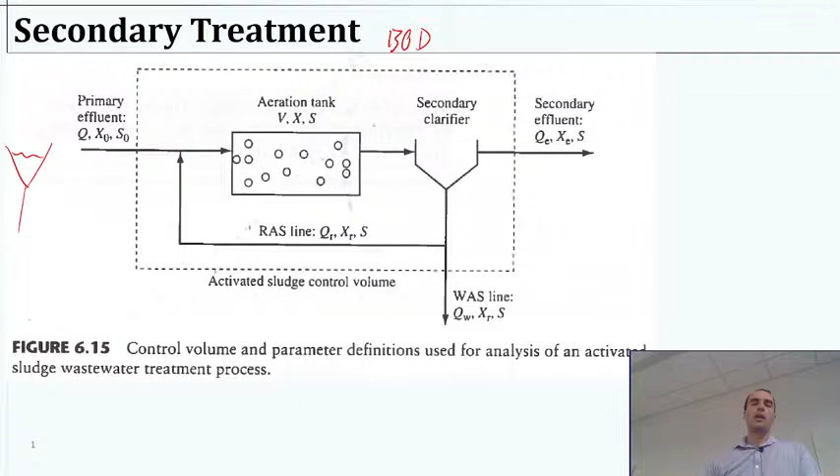The primary effluent comes in as our influent to our secondary system. The initial thing typically will be our bioreactor, a spot where we aerate quite heavily, pumping lots of air. We'll have large blowers in a lot of these treatment plants that are just blowing air from the atmosphere into the water to create all these bubbles. Technically, you could supply direct oxygen and that could work too, but that's kind of expensive, so we just typically take air and blow it through the tanks.

That will mix them, so this will effectively be a well-mixed tank typically. It will act like a CSTR. Of course, maybe we could design it in segments and have a series of them, but a generic tank will be a waste-activated sludge tank.

A little more jargon there: waste-activated sludge, or WAS. Activated meaning we're activating it with oxygen, waste because it's waste, and sludge because it makes a slurry of microbes that can settle out into basically a sludge.

So our activated sludge tank, that's where most of the biodegradation happens. What we want here is a bunch of happy bacteria that are eating and reproducing and doing all the fun stuff in life, right? So they're just making tons of bacteria, chowing down on as much food as they have available, and then we're sending them along the way.

After that, the next part of secondary treatment is another clarifier. I say clarifier, this is the same thing as a sedimentation basin. We've already talked about what a sedimentation basin is. In wastewater, we just tend to call them clarifiers, and it has the same function. So when I talked about that primary clarifier, that's what I meant, it is a sedimentation basin. It's very typical to see wastewater sedimentation basins as circular and called clarifiers.

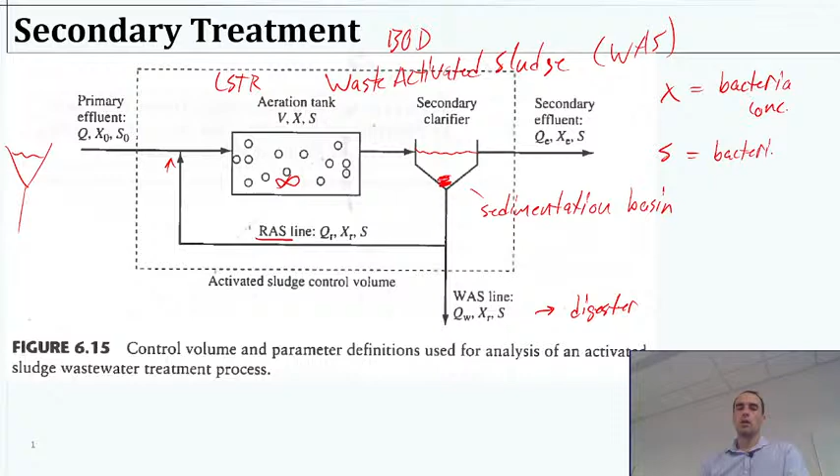S is going to be a mass concentration of bacteria food, the BOD. I've got more slides that will elaborate, but just to give you an impression, we're going to end up with a system where we care about a couple of different things: the amount of food that's there, because that's our waste stuff we need to get rid of, and the amount of bacteria there, because they are the ones eating the food. So we're going to end up with a system that has multiple mass balances if we care to deal with it that way, but fortunately we can simplify and take the mass balance principles to a more simplified mathematical approach to handle our system.

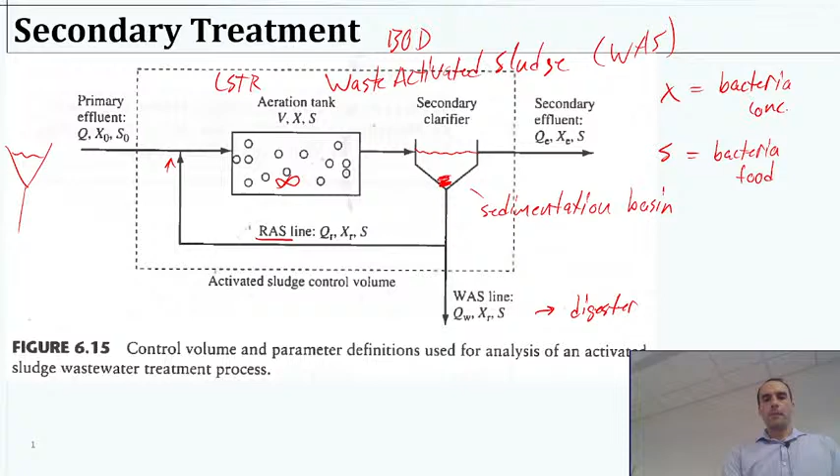Okay, so we're going to use microbes. Here's the terminology again with a bit more context. The waste activated sludge, or the activated sludge generally, that's the slurry of microbes. When we are aerating it or mixing it, that makes the whole system a CSTR functionally in the aeration basin. The clarifier is not aerated, so usually we assume nothing important is happening there in terms of the mass balance, in terms of the food being eaten. We just kind of ignore that.

We might call the wastewater high strength or low strength, or weak or strong wastewater. Really, what that means is how much bacteria food is in there, how much BOD is in there. A weak wastewater would be something like 60 milligrams per liter of biological oxygen demand — milligrams of oxygen demanded, or that could be demanded by biology, per liter.

Just as a side note, the saturation for dissolved oxygen — we're going to talk more about this later — turns out to be, at room temperature, typically around 8 milligrams per liter. So if in every liter you're demanding like 50 or 100 milligrams of oxygen, and you're not having really good exchange with the atmosphere, then you're going to go to zero oxygen really quickly.

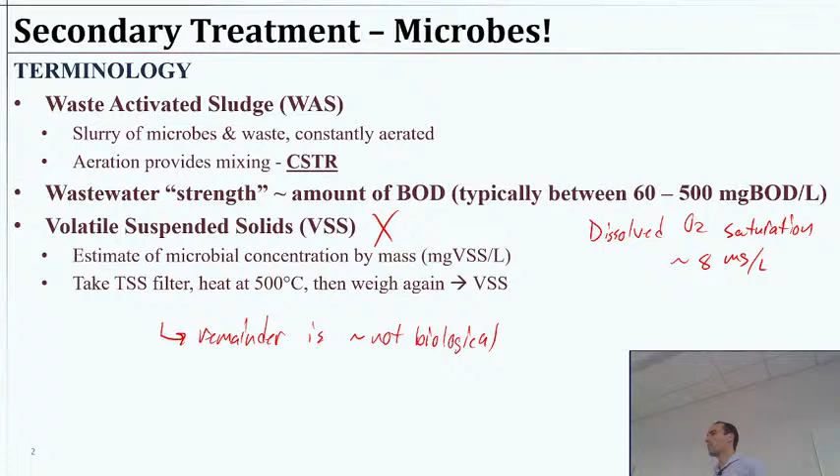Okay, so all told, this just gives us a way to get a mass concentration of bacteria, which is pretty handy, and a way to perform this measurement in the matter of a few hours. Take it, filter it, dry it, and then bake it.

Okay, typically our targets for how well does this work? We're going to aim for 95 to 98% of BOD removed. So if we had a strength of 100 milligrams BOD per liter, now we're down to the 2 to 5 milligrams per liter range. So if our wastewater strength was 100 and we removed 95%, now we're at a level that even if we did put it in 1 liter of water and prevented exchange with air, it would probably not bring the total down to 0, even with that amount of biological activity. So that would be great.

Now, as I said, we'll get more to all that later, but that's typical. Now, if we recall, I talked about this a bit already. We have some ratio of nutrients for the microbes: C for carbon, N for nitrogen, and P for phosphorus. It's kind of what biological material is made of. Usually we'll treat the secondary system as if carbon is the limiting factor, to try to get rid of most of the carbon demand.

But at some point, we've removed most of the carbon, and then we might have a lot of nitrogen left over, so that might tell us we need some different tertiary treatment to get rid of more of the nitrogen. Or in some cases, I think I mentioned that tissue recycling plant example, they actually had a lot of carbon from the tissues, the fibrous materials from recycling paper, but almost no nitrogen or phosphorus. So in order to remove them in the first place, they had to add fertilizer.

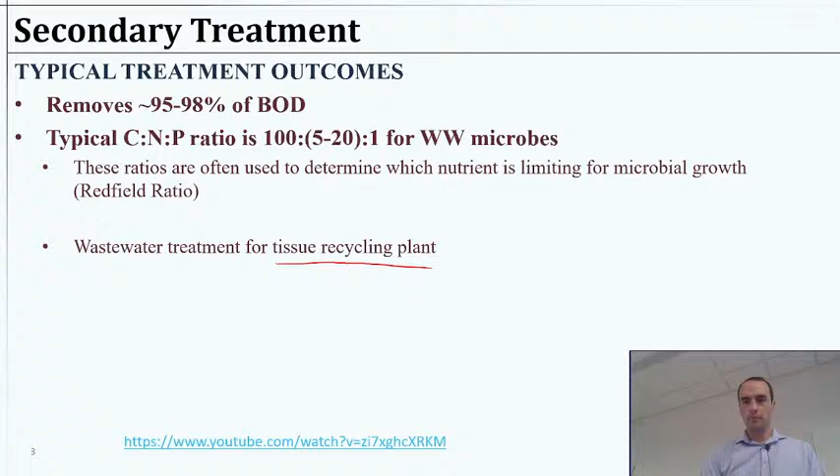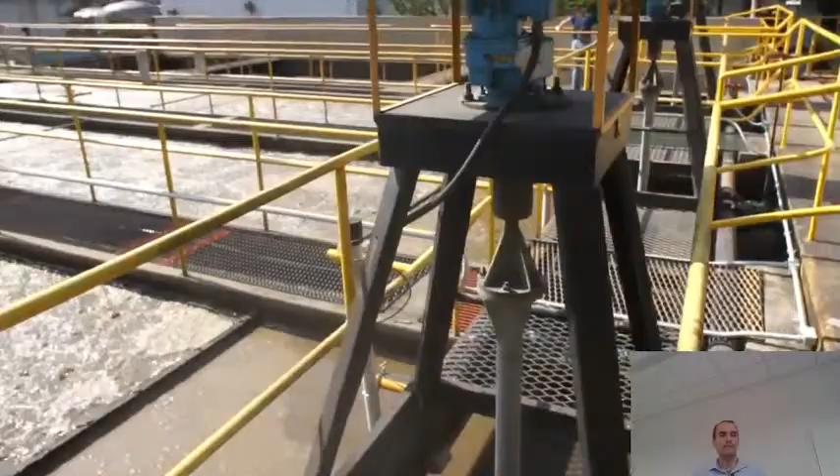And you see it's quite active with all the bubbles.

We've got plenty of guardrails. It might be obvious to you that you don't want to fall in there, but what might not be obvious is that if you did, you can't swim, because all the bubbles are going to remove all your buoyancy, and so then you sink. And if you fell into a wastewater treatment plant like that, you'd have to walk until you find the ladder, and hopefully you get there. So if it wasn't obvious, be very careful if you're walking around an activated sludge chamber.

It's also why, if you're ever on a sinking boat, you probably want to swim away from it to avoid all the bubbles that will follow as it sinks.

Buoyancy is helpful. Okay, so we've got a couple chambers here. You can see two chambers of this activated sludge, and it's probably going to act like two CSTRs in series. We didn't really talk too much about sequencing reactors, but it's something we could certainly do. I don't think I covered it with you guys, so we're not going to deal too much with it.

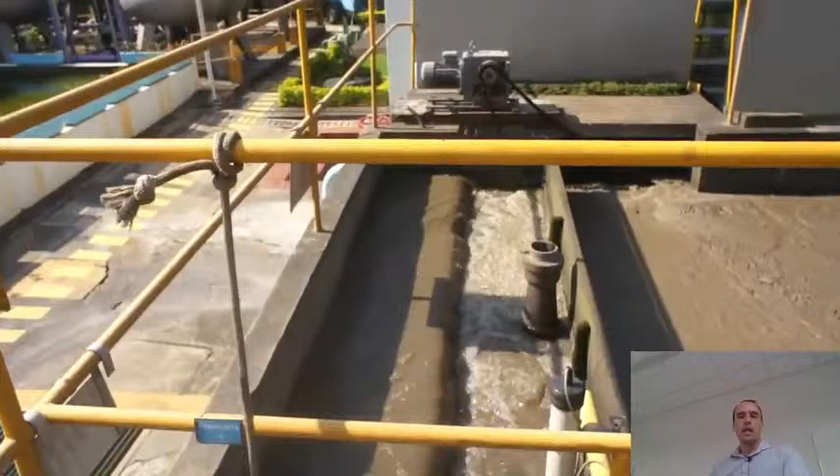Once we're done with the activated sludge chambers, we're coming back here, and we see it's really nice and rich and brown with bacteria and a lot of scum layer on the top. And now we're going to let it sediment again. It feels a little weird that we wanted to make it dirtier, but what we're doing is making it more particulate, right?

So after that sedimentation chamber that we just walked by, now this is probably, if I were to guess, where they would be dosing with chlorine or doing any other kind of disinfection step. This is a fairly compact plant, not a very large plant here. And then you see here, this is essentially our secondary effluent.

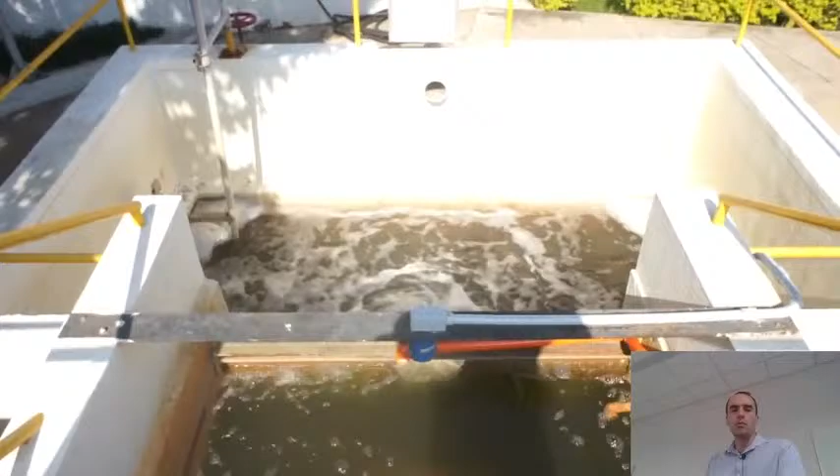Looks like that might just be where they're essentially done. So I would guess this would be a small city or a large village type of plant, maybe 20 to 50,000 people or something like that. I would be surprised if it was much more than that.

And you see here the water coming out actually looks a lot better, right? It looks a little bit more like river water, something much more reasonable than what was coming in. Still wouldn't want to drink that.

All right, so the question for us becomes, how do we model the growth of the bacteria and the removal of the substrate, the food? This is our challenge in terms of engineering a system. How do we design it? Well, we need to know at what rate the bacteria grow, and what does that depend on?

So, a little bit more terminology, and we're going to cover some terminology so that we can use what's called the Monod equation. This is essentially a growth equation that defines our rate constant.

Okay, so we've done rate constants for a while now this semester. We have some rate of change for our bacteria, rate of growth for the bacteria. We could say the rate of change of x is going to be equal to some function that looks like k times x to the 1 power, right? We've seen that, we've seen things that look like that. But instead of k, I'm going to say this is now mu.

So mu is essentially a rate constant. That's all I'm saying here. Given that, we can make a lot of sense to this and relate it to everything else we've been doing in the class so far, or almost everything.

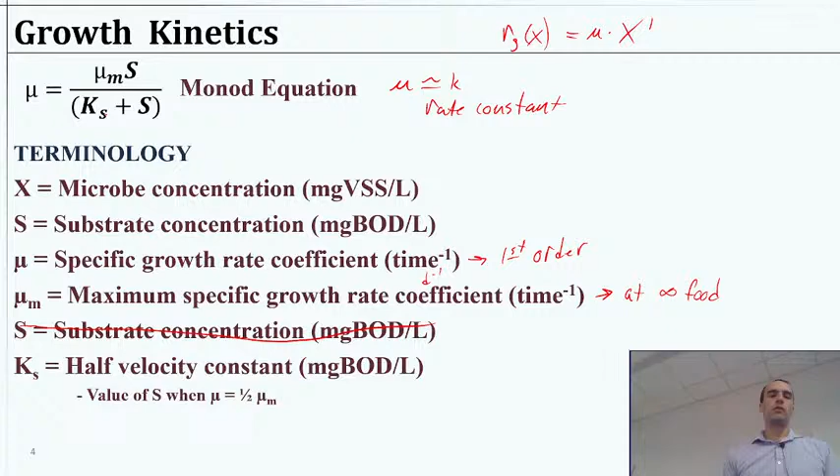And if we look back at the equation, it's like the maximum possible times the amount of food, divided by the amount of food plus half of what would get them to fully happy.

But this is kinetics that microbiologists will use quite often, and people digging into the nitty-gritties of wastewater treatment in the microbial sense. This stuff, and all the different factors that would affect this kind of thing, is perhaps interesting for them doing their research.

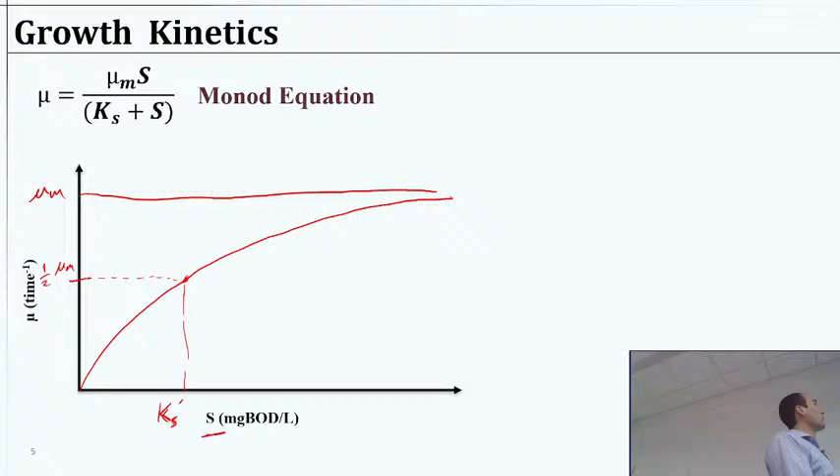Okay, so that's kind of in practice. You'll be given a value for Ks, probably. I mean, I guess maybe we could solve for it, but typically you'll be given a value for S, you'll be given a value for Ks, we're finding mu, and we need to know mu max, or maybe you're given mu max and we need to find mu, something like that. So just different pieces that are typical for a system.

I want to give you one other picture here about microbial growth so that you can understand a little bit further about how microbes work and how we can expect them to act in reality.

So if we take some microbes and put them in some nice warm environment with lots of food, let's say I put some good broth in here that has lots of microbe food, heat it up to maybe body temperature, and just let it grow and sit there. You've accidentally done this when you left food out and it got warm and stuff started growing on it. Hopefully not, but it happens sometimes. It'll smell like something's decaying or rotting. Something's growing, right? If we let bacteria grow and give them enough oxygen and food, they're going to grow and grow and grow.

But there is a limit. So if we just take a jar, for example, and do it in a batch system, what we will find is at first there's some lag phase. We have some bacteria there, but not many. They're starting to replicate, but first they have to kind of figure out, oh, hey, there's food here, the environment's good, let's make babies. And bacteria are not quite that exciting, they're just splitting, doing their own thing.

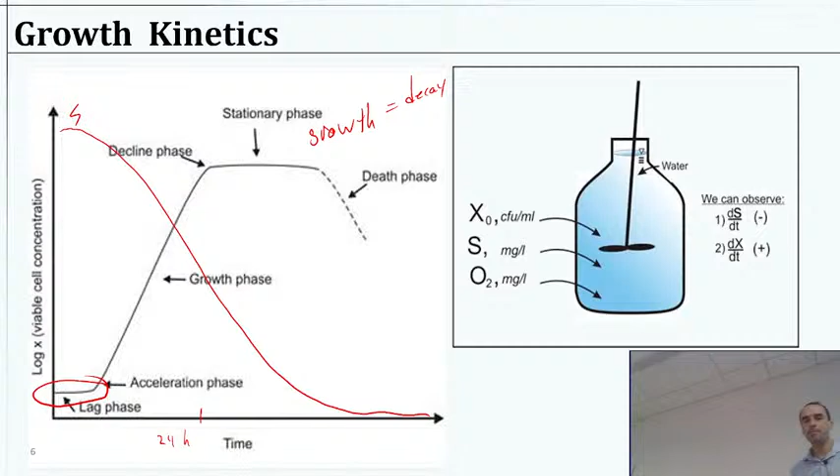The amount, if we were to plot the food, I'll draw that a little better. So there's that inverse correlation in terms of the bacteria growing quite happily up until there's not really enough food left over. So that gives us a little perspective on how we might expect our systems to interact here.

All right, so let's start with growth then. Our growth rate, we already talked about this Monod equation. That's giving us our rate constant. So we can define our rate, this is a growth reaction, right? Because a lot of the reactions we've done so far have been decay. So now we have a positive instead of a minus. So our dx/dt is mu x, and you think of mu as a rate constant. So dx/dt equals kx, in this case mu x, and we have a definition for the mu, a formula for it.

So Rg, the rate at which we're growing, is mu x. We could then put mu here, substitute it in, and say Rg is equal to x times mu max times s divided by ks plus s. There's our rate of growth.

Now, we can put that rate equation into a mass balance, right? Could be a batch reactor, could be a CSTR. We can do with that just like we've done with our other reactions earlier in the class. Okay, so we're going to set that aside for a moment, and now I'll switch gears to think about how the substrate is changing and relate that in some sense to our growth rate.

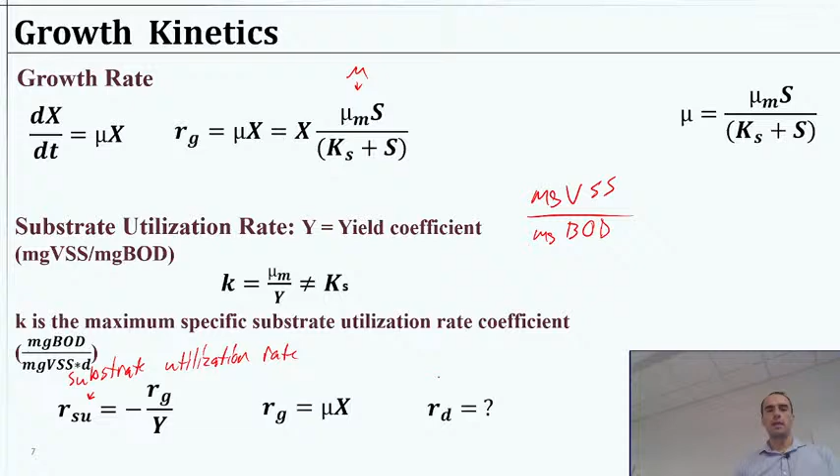Now the only thing remaining that we might need is the rate at which the bacteria are going to die. So we have another dx dt, this time a decay rate, Rd for the death. This will be kind of that death phase, or the rate that dominates during the death phase. We can define this pretty simply: it's going to be a first order rate constant. If we have a lot of bacteria and a portion of them are dying every hour, then it's first order with respect to how many bacteria are there. So this is going to be a third k, this one with a d as a subscript.

So Rd is equal to negative kd times x to the 1 power. It's first order, right? So this is pretty straightforwardly a coefficient of decay with a first order unit, which is per time, usually per day.

Simple as that. Okay, so now we have two rates for the bacteria. We haven't done many systems where we're doing multiple rates for a given thing, but it's not too complicated to handle. We can do a mass balance, for example, with a growth and a death rate and solve for that. We just need both of those components within the rate term. We've done multiple inputs before, we've probably done multiple outputs before in a mass balance. There's no reason we can't do multiple rates in a term.

Okay, so putting these together then, we could get a net growth rate, which would simplify even further this process of setting up a mass balance. Say the net growth is going to be R prime G, the rate of growth plus the rate of death, right? We could say minus the rate of death, but the minus is already kind of caught up in there.

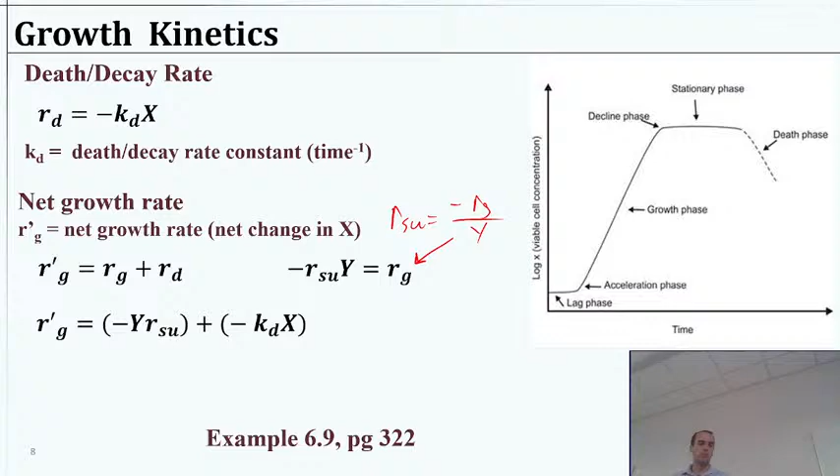If we rearrange that and substitute it in, we end up with a term for the net growth rate in terms of the change of substrate and a death rate that's relatively straightforward. That might be useful because we can just track what's happening to the substrate, and we know something about this constant, so we don't have to deal as much with the growth rate kinetics. Sometimes it's useful to rearrange it that way, since we can cancel out some of the variables we had to deal with.

Okay, so I want to take a look at this example. We have BOD consumption in a pond. We've got a bunch of characteristics for this pond, the different species and different items in here. It says the shallow pond depicted here stays well mixed due to the wind and steady flow through of a small creek. So we're going to be asked to find essentially the amount of substrate leaving and the amount of bacteria leaving, XF and SF. See that right here.

I'll come back to all of this data for us to solve. I'll just note real quick, I'll read through these things and then go through and read the actual problem. We have a few typical parameters provided, and we're told to use these ones.

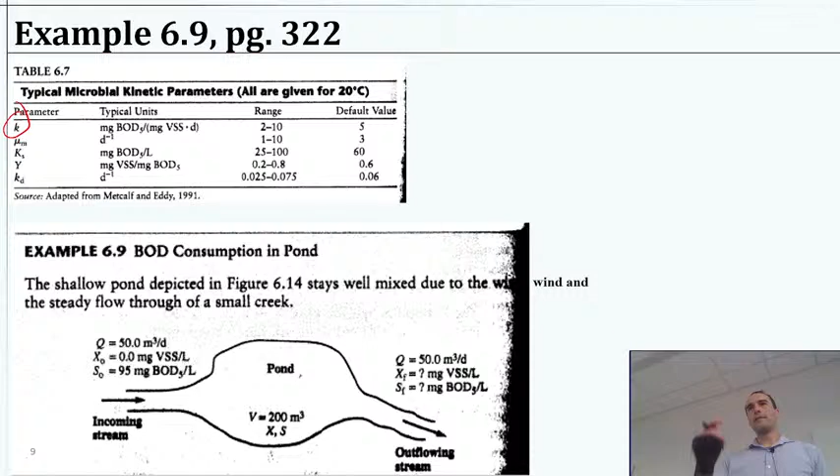For example, a typical value for K, the lowercase k with no subscript, that's the maximum specific substrate utilization rate, or utilization rate coefficient. This ranges from 2 to 10, and we have a default value that we're going to use as 5.

So we've just got a table here. I'll probably give you the values directly, but you might have to recognize what the names are. Just a quick overview: this mu max in per day is typically between 1 and 10, default value 3. The KS, the half velocity constant, is typically somewhere between 25 and 100 milligrams BOD per liter, and our default is 60.

The yield coefficient is usually between 0.2 and 0.8, and we're going to use 0.6. The KD, the death coefficient, is usually between 0.025 and 0.075, and we'll use 0.06.

Okay, so all these parameters, I'll put them back on the slides in a minute. We've got this pond, and we're going to solve for the amount of substrate leaving and the amount of bacteria leaving after they've grown in the pond. The pond itself is well mixed, so that's indicating to us that it's pretty much going to act like a CSTR.

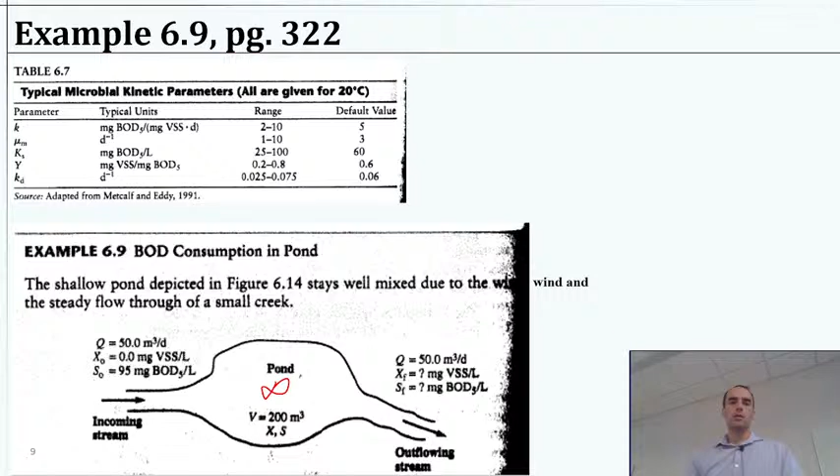We do not have any recycling of our bacteria. As we'll see with this problem, when we don't have any recycling of bacteria, we can solve it directly with the mass balance like we're going to, which is maybe a little more complicated than using the formulas we'll use for recycle systems. But we'll get there—I just want to show you what it's like putting these pieces together, putting the mass balances into a rate equation like we've done, but for this system.

Okay, so it says if the microbes in the pond consume the inflowing biodegradable organic matter according to typical kinetics, those default values and all that, determine A, the BOD5 leaving the pond, that's the substrate leaving the pond, B, the biodegradable organic matter removal efficiency for the pond.

We're not given any equation for this, but it's not too hard to recognize—removal efficiency should be how much we removed, the portion removed times 100%. So this should be S naught minus S, what we started with minus what we ended with, divided by what we started with, times 100%. And C, the concentration of volatile suspended solids leaving the pond, that's X.

Okay, I've got the first little bit there lined up, and I've got another slide where we can put it all together. I'll start you by putting you in line with how they're starting and giving you a bit of a framework to work with.

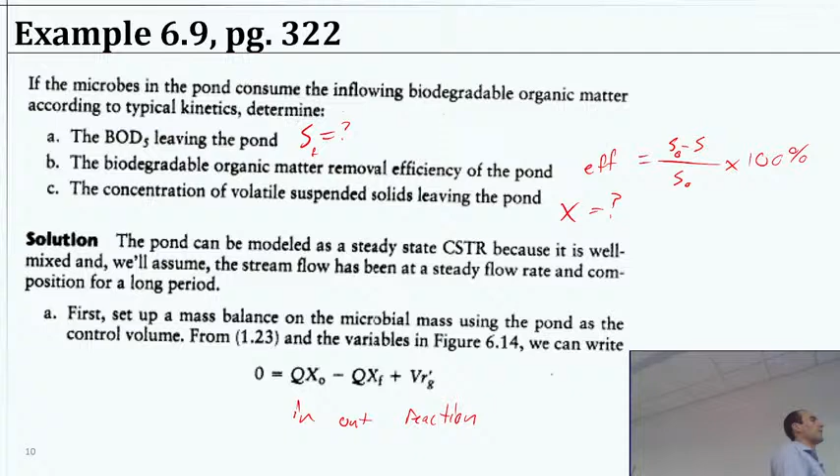So I'm going to give you that tip up front and say, start here with a mass balance on X, and you'll see that we can solve for S. And later, once we have S, we can do the reverse and do a mass balance on S to find X. Okay, so that's the tricky part you probably wouldn't have any reason to think about.

So I'll take a couple minutes to start writing the pieces, the equations and things you'll need, and give you 10 or 15 minutes to work on this. Feel free to work with each other, ask me. Just use this time to challenge yourself to approach the problem.

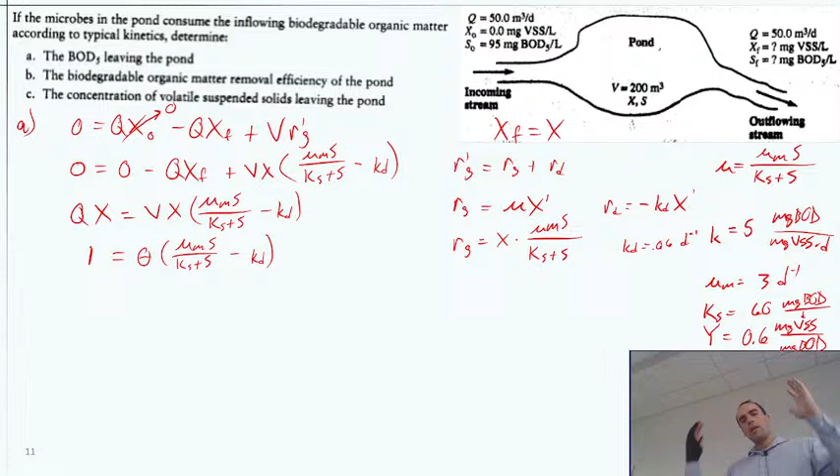So we have Vx times this mu max s divided by Ks plus s, minus Kd, all in that term. And if we look at it right here, what we really just need to do is solve for s. Looking ahead, there's going to be some annoying algebra, but it totally looks possible, especially because we can get rid of the x's altogether.

Because we almost had a situation where we had two unknowns, right? X and s. We need both, and we don't know either, right? That's a conundrum. But given that we don't have any recycle, we actually have a shortcut here because these will cancel.

Because we can add qx to both sides and cancel them, divide everything by q, that puts us into theta and gets rid of the v.

So we have 1 equals theta times this mess. So from here, there's some algebra, right? Thankfully I have the final end target here in case I wander away the wrong way. But let's just go ahead and tackle this and see if we can.

Solve for s here. So it should be 1 equals theta mu max s divided by ks plus s minus theta kd. I just went ahead and multiplied both things by theta, unfactored it, so to speak, so that then I can get the s terms by themselves. So I'll have 1 plus theta kd equals this theta mu max s divided by ks plus s.

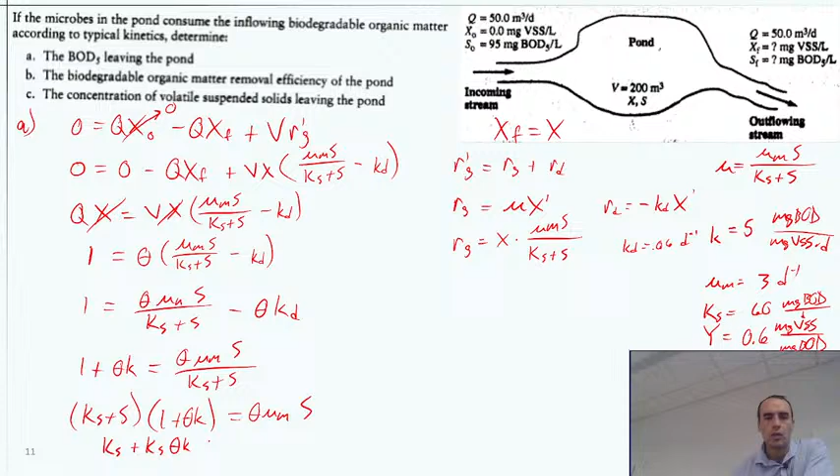All right, so we'll do the k's first, ks plus ks theta k plus s theta k, if I did that right, equals theta mu max times s.

All right, now we just need to get all the s terms by themselves, and I'll go ahead and just subtract the s and s theta k from both sides. So we'll be left with, and I'm going to carve out a little space for myself here, keep it a little clear. So we're going to say Ks plus Ks theta is equal to theta mu max S minus S theta K.

Did I drop the D again? The whole time, right? Sorry about that. And I dropped the KD altogether here also. Okay. All right.

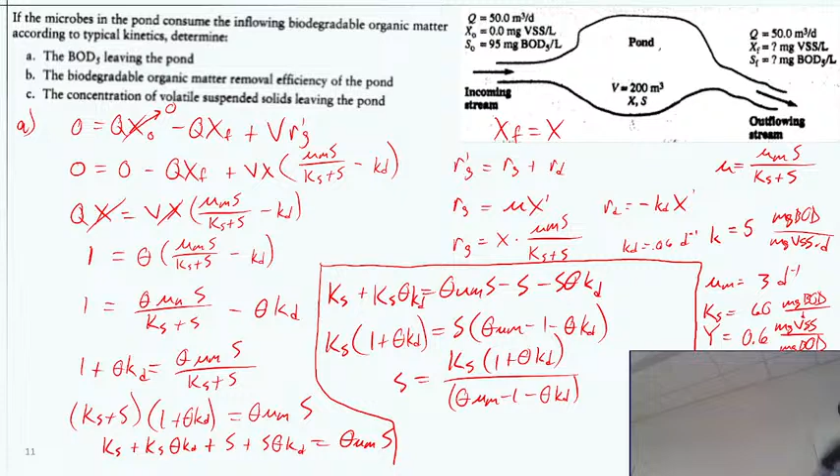In the past, we've done some derivations. We've found a mass balance for X, Y, or Z specific to a given condition, but we saw it several times, right? The mass balance for first order decay in a CSTR, you've seen several times. Pretty simple situation. This one's not so simple. This is quite particular to this case. I mean, any mass balance we solve is usually quite particular, but this one, just make sure you're not trying to use this.

I think if I give you a question like this on the exam, I'm probably giving you this formula. So it's up to you to know that this formula is only for this condition, where there's no recycle. It's kind of like the lake example, right?

And this is the solution to the mass balance on X, right? We did the mass balance on the bacteria concentration. Okay, so let me put in the numbers here, or rather look at when I previously put in the numbers. It turns out to be the same number as the problem example, which is super clever. This is 6.9 milligrams BOD per liter.

Okay, so the answer there is that for this problem that was pretty involved. Okay, does that make sense? Did you get to the point where the algebra was annoying? Yeah? Did you get stuck there? Yeah. I don't blame you for that.

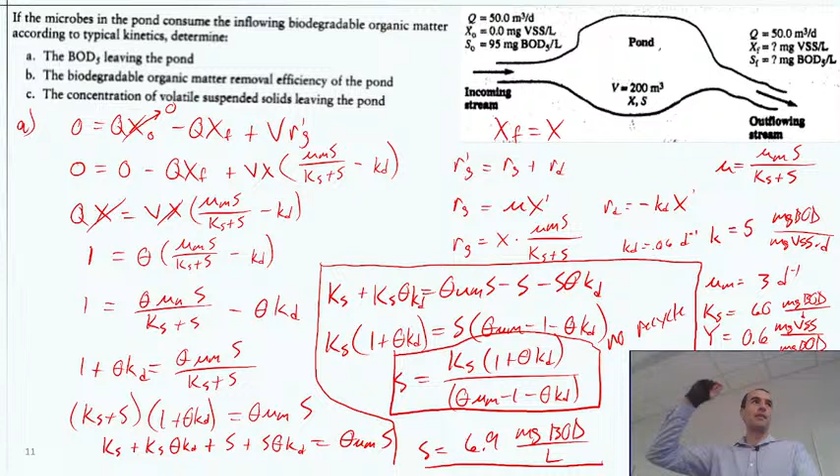Okay, but the nice thing is if you got to that point where you're recognizing this is annoying algebra, well, you kind of got the core concepts of the problem, right? And that's what I'm hoping for you to be able to see is like, given a little direction, you're able to put in the rate equations into this mass balance and go there.